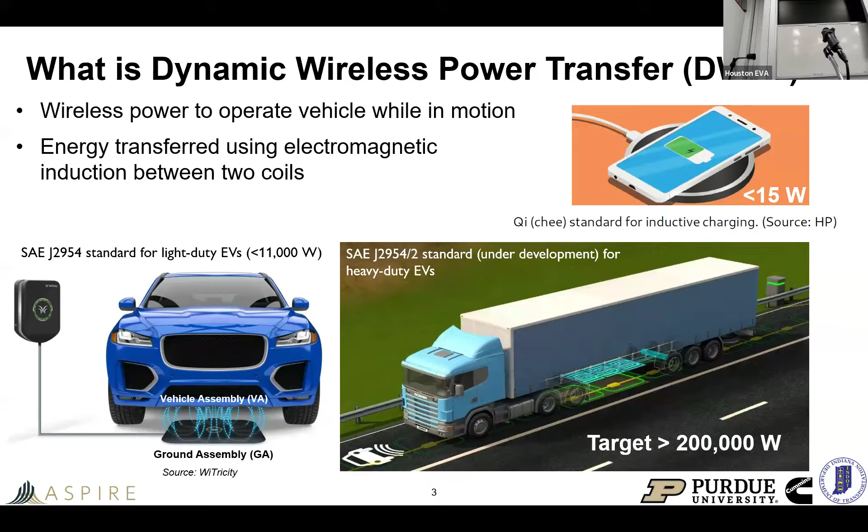And the focus became heavy-duty vehicles for a reason, and we'll talk about that here in a second. But our goal is to make transportation cheaper, safer, more reliable, and we focused in, like I said, on heavy-duty vehicles. The key advantage, if we can get this to work, is a much higher efficiency. I'll just say now that end-to-end efficiency from the utility grid to the vehicle's battery system bus is on the order of 85 to 90%. So very strong. That energy can be supplied to the grid for a number of means.

And the challenge is, of course, for electrification, batteries are expensive and heavy, and that's our target, to lower those. And we envision that the DWPT, at least for heavy-duty freight vehicles, could reduce battery needs by a significant amount, up to 90%.

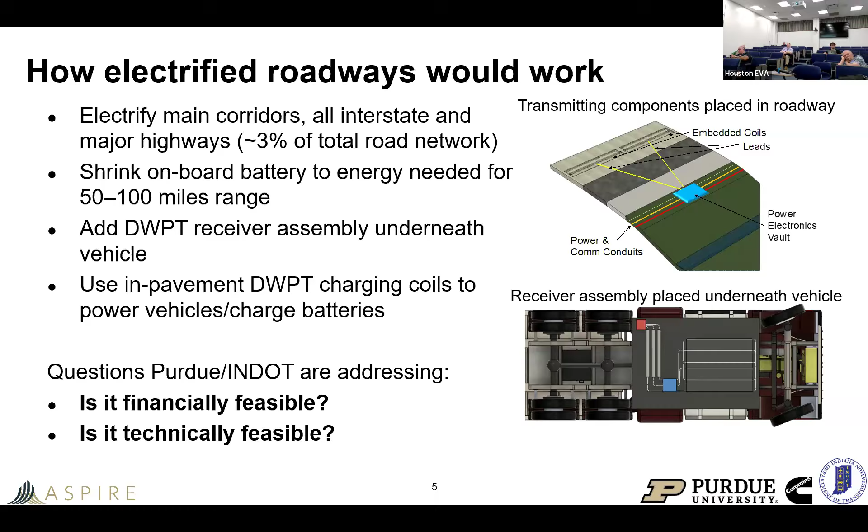Now, if you're thinking about this as a Department of Transportation entity, or you're thinking about this as a vehicle owner, you're wondering, is this financially feasible? Because it's a lot of equipment. And that was one of the targets that we were focused on early in our research around 2019 and 2020. And Dionysios Aliprantis, our colleague, led that.

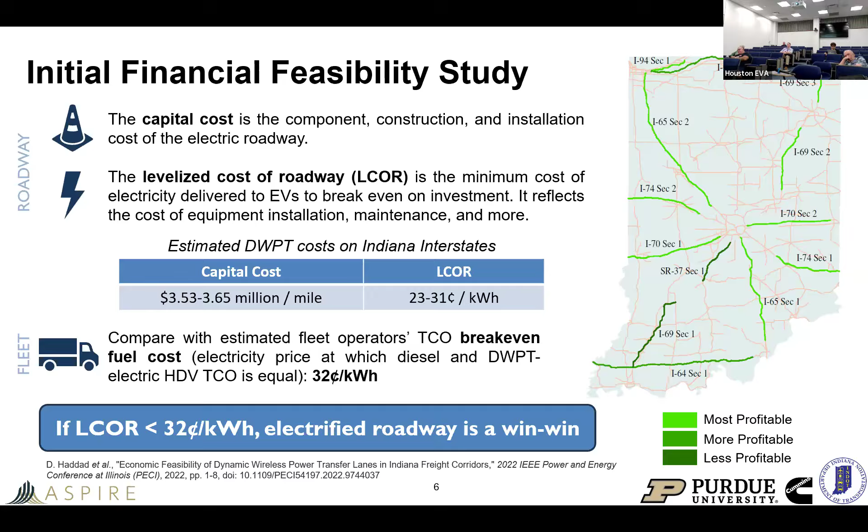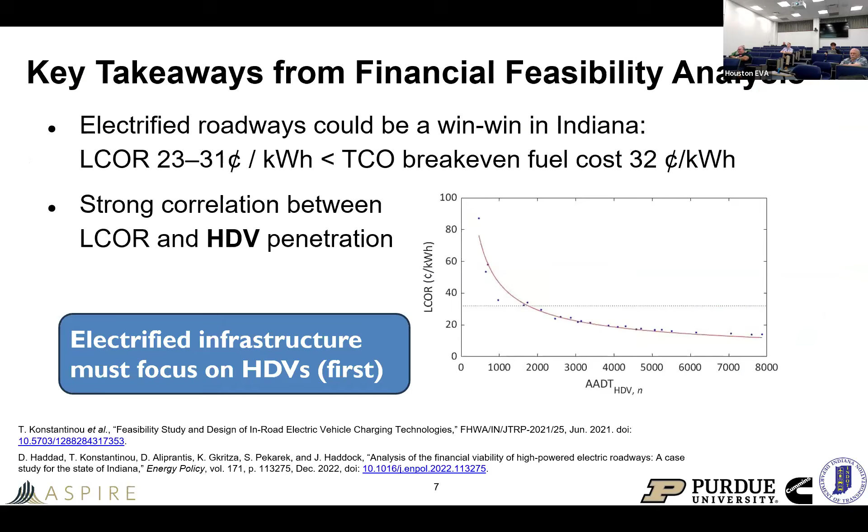And so what you can glean from this is it's a win-win situation, because in Indiana and most ways across the country, the levelized cost of the roadway can be in the low 20 cents. So you can make money, and the fleet operators are happy as well. So for financial feasibility, the key thing is you get the levelized cost of the roadway down by servicing. You don't have to service everybody, but you have to design your roadway system to take heavy-duty truck traffic, and you have to have those heavy-duty trucks on that roadway. And that's what this slide highlights. So that was the feasibility.

Now, the technical challenge associated with this is it requires for each heavy-duty vehicle on the order of 200 kilowatts if it's an 80,000-pound vehicle that's driving 65 miles an hour. And that's a significant challenge associated with this overall system from a technical point of view.

And that's made even more challenging because you have to place your transmitter coils below the roadway surface, more than 2 inches below. And vehicle manufacturers like to have clearances, particularly for heavy-duty vehicles, above 8 inches. So you're talking about over 10 inches of distance between coils, and that's a challenge. So we have high power, long distance between coils.

And what we were able to do, and Aaron Brovont, our colleague, led this, is to design a topology that's a 3-phase topology that enables us to do this and do it for relatively low cost. And why is that? Well, it's because we don't have magnetic material in the roadway. The only thing that we place in the roadway are coils. The vehicle receiver also has coils, and it has some magnetic material to tune the flux paths.

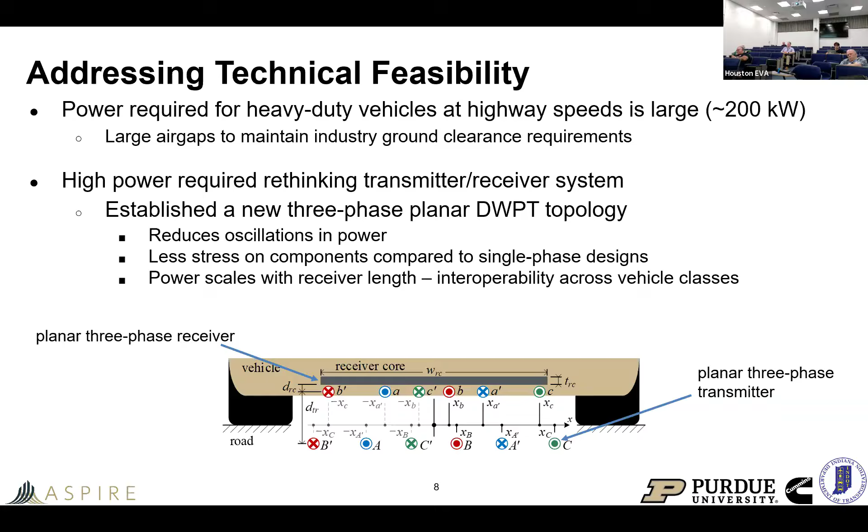I'll show on the next page, this is the actual system that we had tested in our laboratory, and there is the ground assembly that gets placed in the roadway. There's 3 coils there, an A, B, and a C. Each has 2 turns, and then the vehicle assembly as well. You can't see the receiver coils other than some end turns, but then subsequent to that, you see some electronics. And after I present and John talks some, we can talk technically in more detail.

There's waveforms on the right. You know, we're academics. There's nothing that's going to make us more happy than discuss plots.

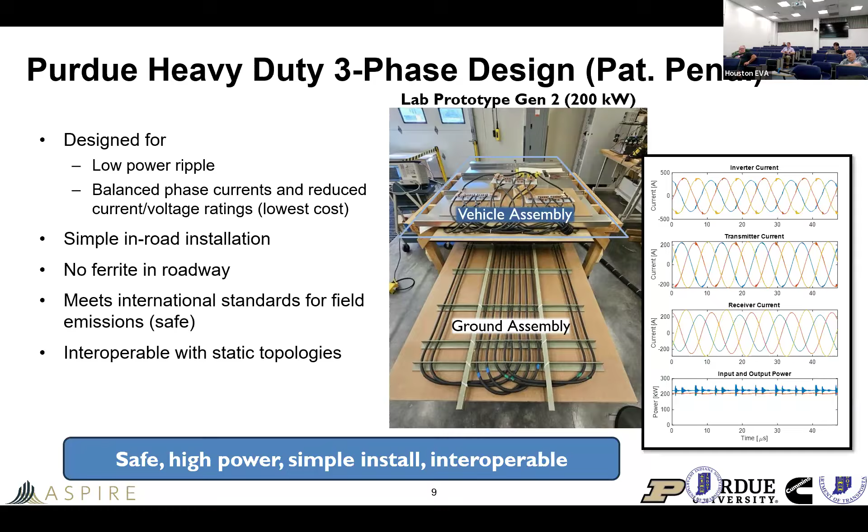But for right now, I'll just move on and say, John then led the questions regarding structural and thermal assessment of our system before the instantiation in the roadway. And John, did you want to say anything about that? No, I'll just point out that we have here at the university, in conjunction with our state DOT, an accelerated pavement facility, which is what you see there. And basically, we're able to build pavements in there.

And you can see on that top picture, there's a pavement. You can see the coil put in it. And then we're going to put some asphalt in around and over that. And then that machine is half a semi-axle. So it's basically 9,000 pounds on a dual tire. So that's half of what an axle on a semi tractor trailer would be.

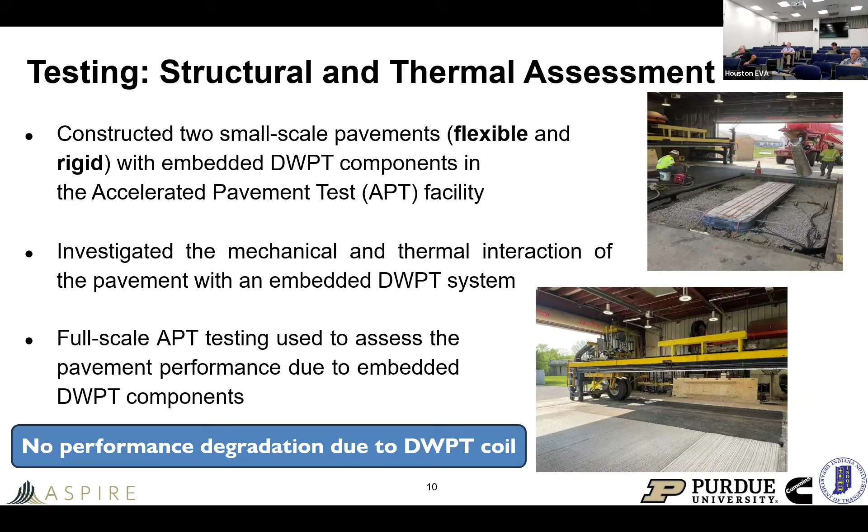And we're able to traffic that back and forth and then get some idea in a controlled environment what the pavement's going to do under loading. And in this case, we had no idea what would happen with these coils under loading, nor did we know what would happen thermally. And so we were doing some thermal testing in a controlled environment as well. So I'll stop with that, Steve, if you have another slide.

Yeah, and John and I will tag team on these because subsequent to those tests, which took a couple years to instantiate and prove out, the Indiana Department of Transportation was interested in going forward and saying, well, how do we actually install this into a roadway system? And that's indeed what we did. The pilot was on US 231, just west of the Purdue campus.

And there were a number of goals associated with it, including validating our performance predictions, demonstrating safety of the technology, and advancing businesses that support such efforts on electrification. It was adjacent to a maintenance facility of INDOT's. You can see that on the top left. That provided kind of a support structure for us in constructing the system.

The roadway then was, you can see the picture here, there was a multi-step process. This was not a new roadway. It was an existing roadway and it's a concrete pavement, and this was intended to then be retrofitted into that. That is not how it will be done in the future. When this comes to fruition, it'll be placed in fresh roadway, but this is the opportunity that we were given, and went with that. And you can see the different stages. We'll have some slides now that show you each of these stages.

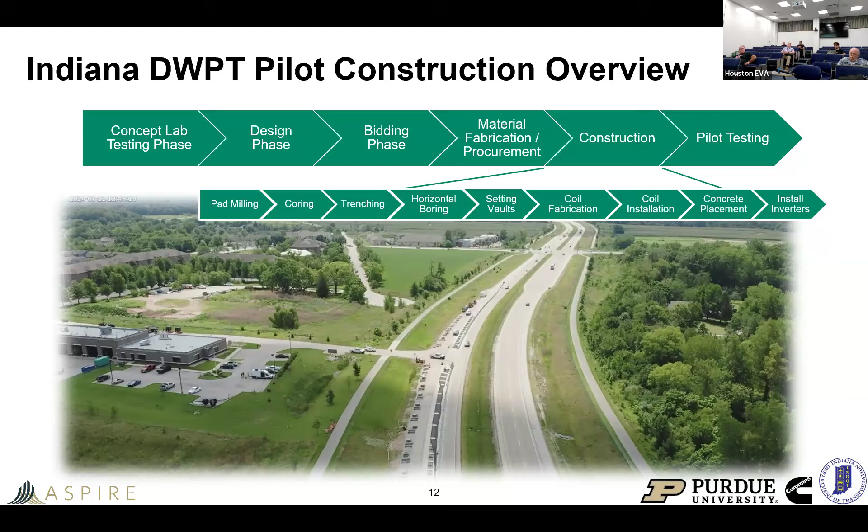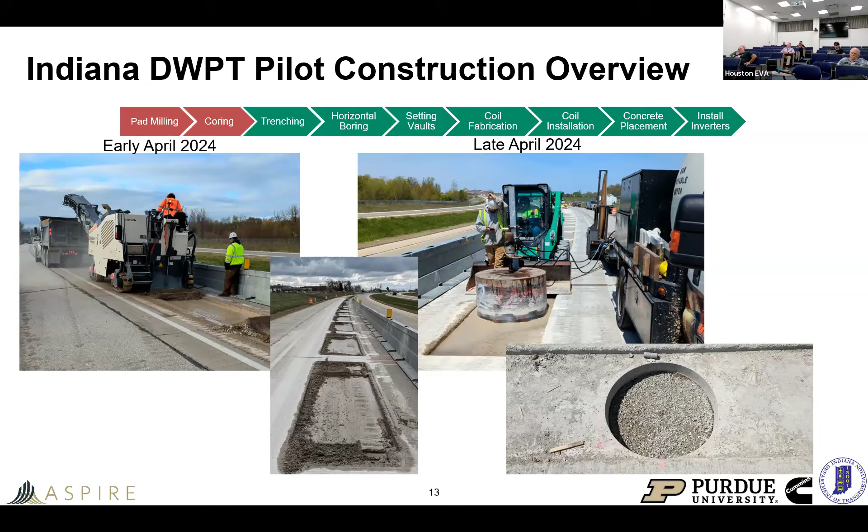And the reason for that 12 foot is there were existing metal dowels that were placed between the roadway sections that are 15 foot long. So we had to stay clear of those.

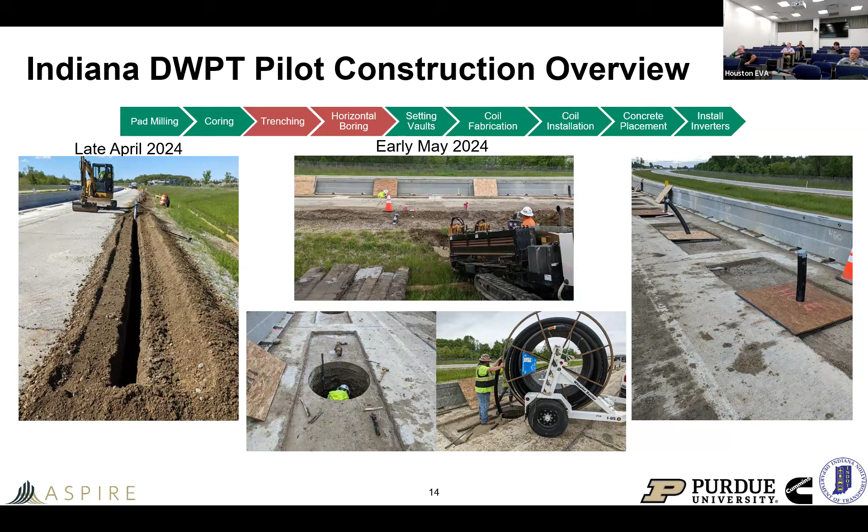And this was the process where we're transitioning more to the electrical side, where we're now adjacent to the shoulder, and they're putting in channels for electrical conductors between vaults that house the electronics. In the center picture here, you can see them. John had mentioned the bored hole in each of our transmitter milled sections. They're now running conduit from there to the side of the roadway to be connected to the electrical system.

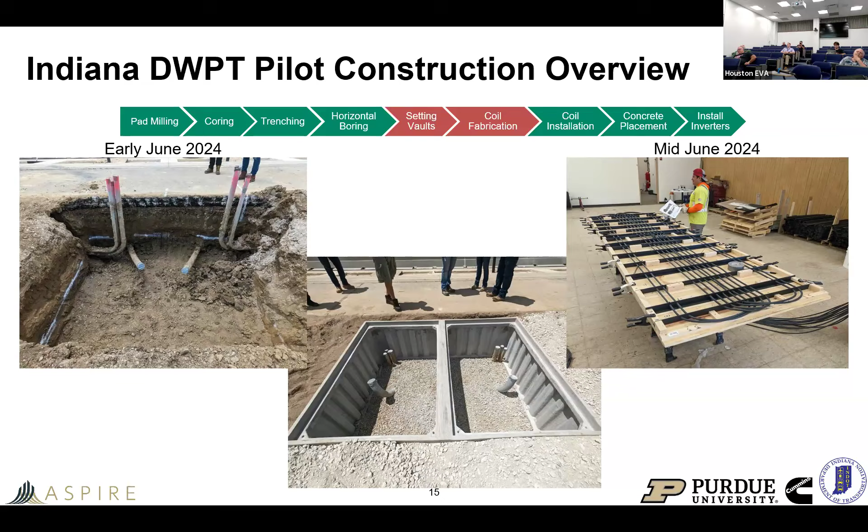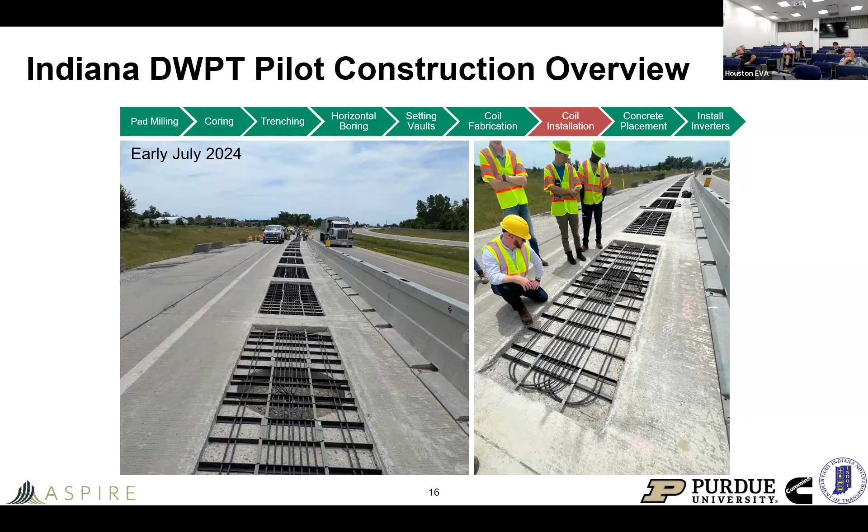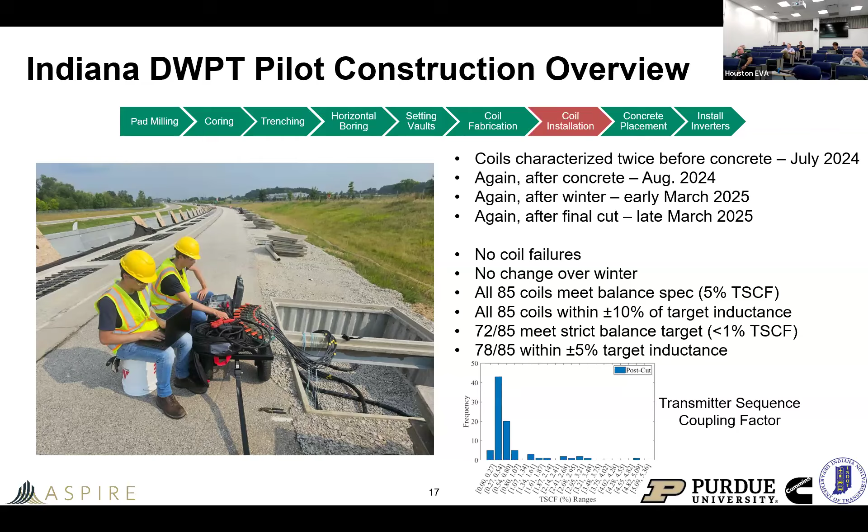And the bottom line is, even though this was the first ever instantiation here, all of them met that target. And the majority were far superior on meeting that target. We've tested these coils now 4 times through different stages of construction and after weather and traffic, and they've met this and performed exactly the same. So there's been no degradation that we found.

And on the right is them putting the inverters into the vault. The inverters were manufactured by a company in Indiana, PC Krause and Associates. They produced those 85 inverters. They're air cooled. So you can see the fins that are facing us on that right-hand picture where the contractor is putting it into that vault.

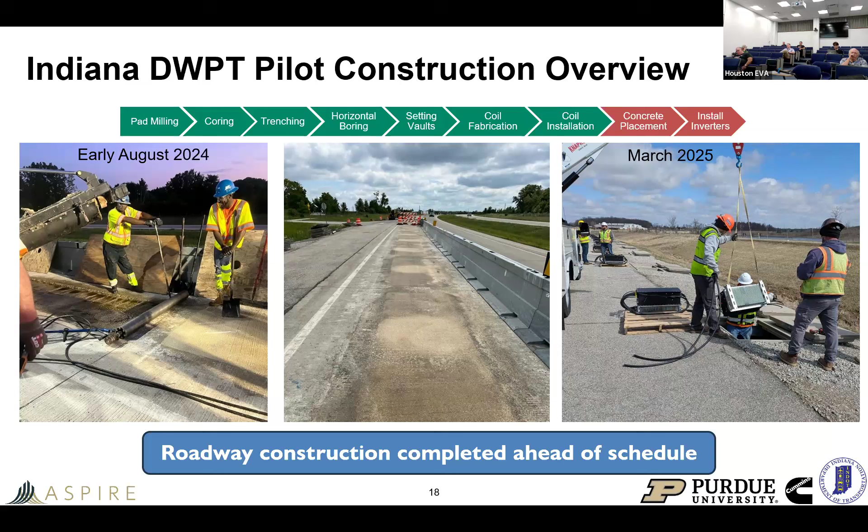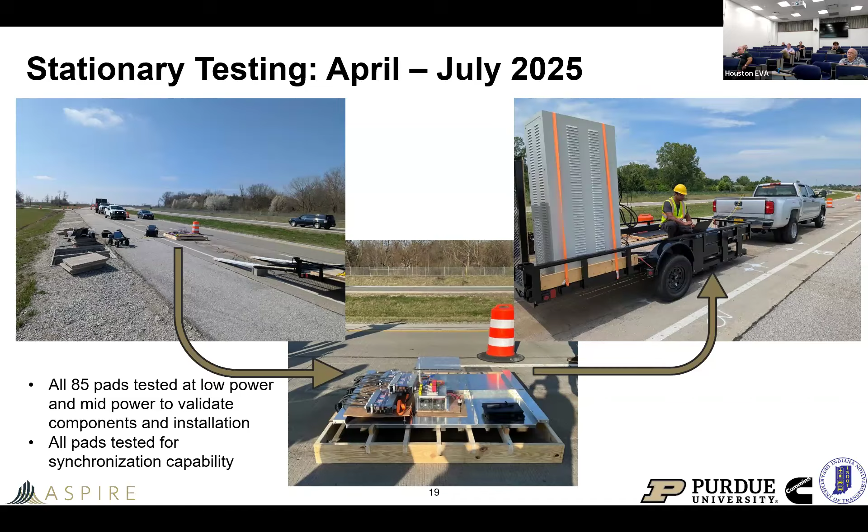And after that successful testing, we tested with the Cummins vehicle. Our responsibility in this effort was to design the receiver and implement it underneath their vehicle. And then we also had a DC to DC converter to interface, take the energy from the receiver and communicate to the battery/propulsion drive. The way this worked is their control module, the Cummins control module, would send a power command to us. And the DC to DC converter that you see as a gray box there, its whole function in life was to deliver that power that was commanded.

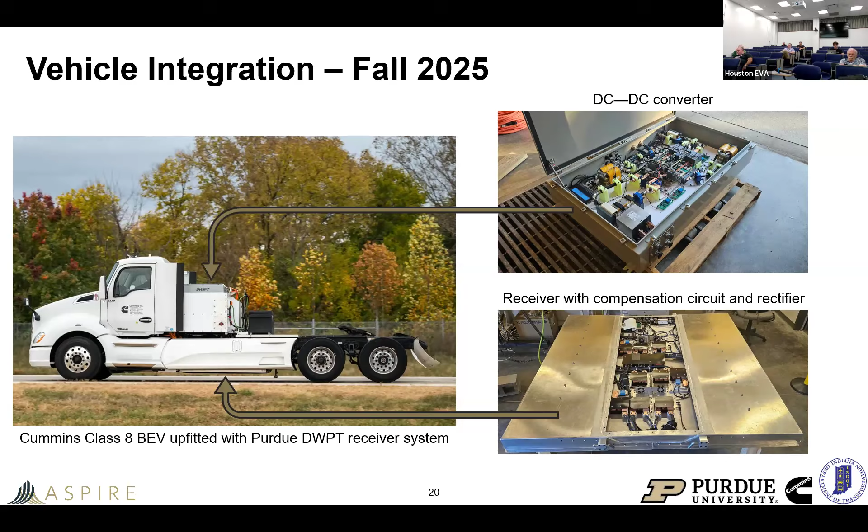Rob Swanson, our research engineer, was instrumental in building the bottom right here receiver unit. A remarkable achievement for an electrical engineer to get this structurally sound for 65-mile-an-hour tests. And Vatan and Isaac and Nick were the ones that constructed that DC to DC converter. They designed it. And this just shows you some plots associated with it.

We can go back to these and talk about voltages and current if that's your love, but I'll just point you to the first thing to say. The green lines are the most important on the plot. Those are the power that the roadway's delivering to the vehicle. So this is the power at the DC bus of the vehicle in green. And then the level that's shown is what the vehicle commanded.

So the bottom left shows 50 kilowatts commanded. You can see that the roadway delivered that. There is an oscillation. We'll talk about that here in a little bit, but on average, it delivered exactly what it was supposed to as the vehicle is moving 65 miles an hour. Then the command came for 150 kilowatts, and you can see that that was achieved as well. The achievement comes when you're over the pad.

So if you remember, our transmitter pads are 12 foot long, but that leaves 3 foot of a gap between them. And so you can see this oscillation that occurs. So there's 150 kilowatts, and then it drops. And then it goes back up. And that drop is because we have the 3 foot gap between our transmitters. Do you have to have that? No, you don't in future roadways. We did because of the dowel rods that were in the existing roadway.

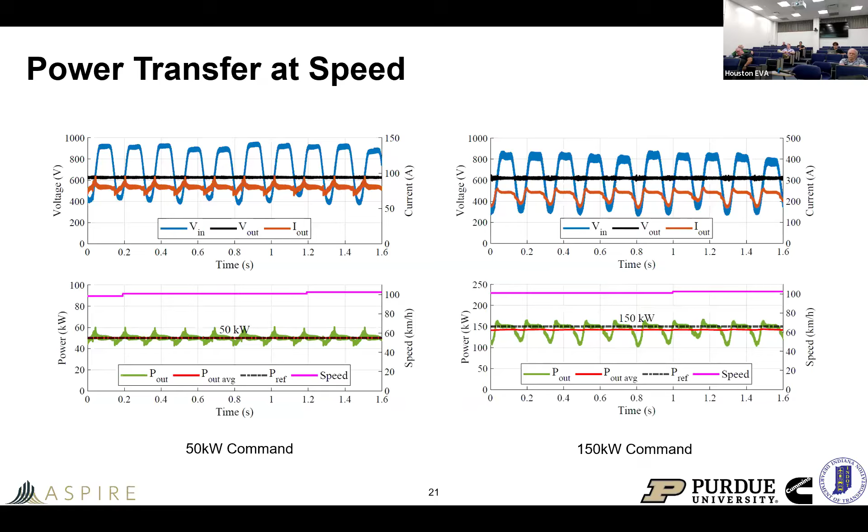Our target for power transfer was up to 200 kilowatts. We had a battery system that was supplying our roadway, and it couldn't deliver the full power, so we didn't get to 200 kilowatts, but we did get to 190 kilowatts at 65 miles an hour. And this was the plot that shows that. The note here is our peak is 190 kilowatts. Our average was about 168.

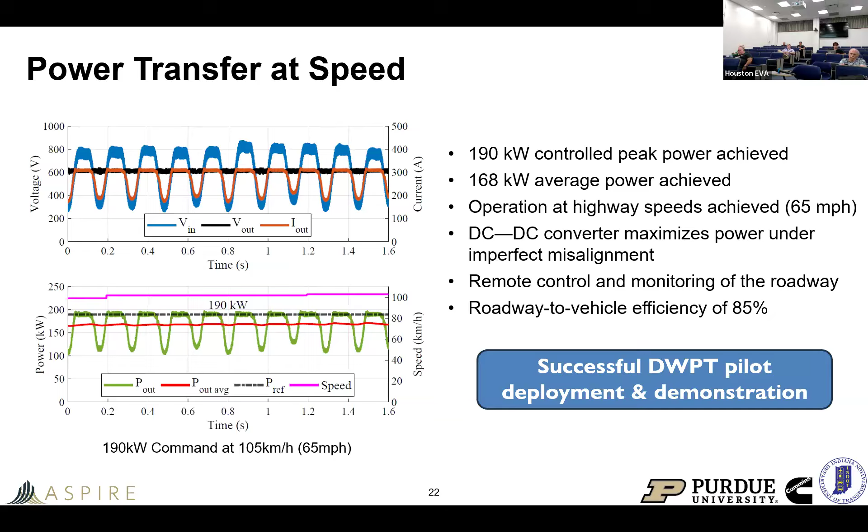And just looking forward, our Aspire Center has been asking, when could we see these? And our target was to develop pilots by 2026. This was created many years ago, like in 2021, and we've achieved that. And Aspire is also supporting the development of roadways like this in Florida, some in Michigan. There is one at the inland port, not a full roadway like this, but something quasi-dynamic in Utah

at Salt Lake City. And we're anticipating, maybe not in the US, it may be globally, but in the next 5 to 8 years, we'll probably see longer roadway sections, 5 to 10 miles. And the hope is that by 2040, we can see this rolled out on interstates. And Aspire has a target where we would like to see 1,000 miles of roadway with multi-state pilots by that time. John, did you have anything else you wanted to say?

No, I don't. I think you covered it well. Thank you. Yeah, thank you.

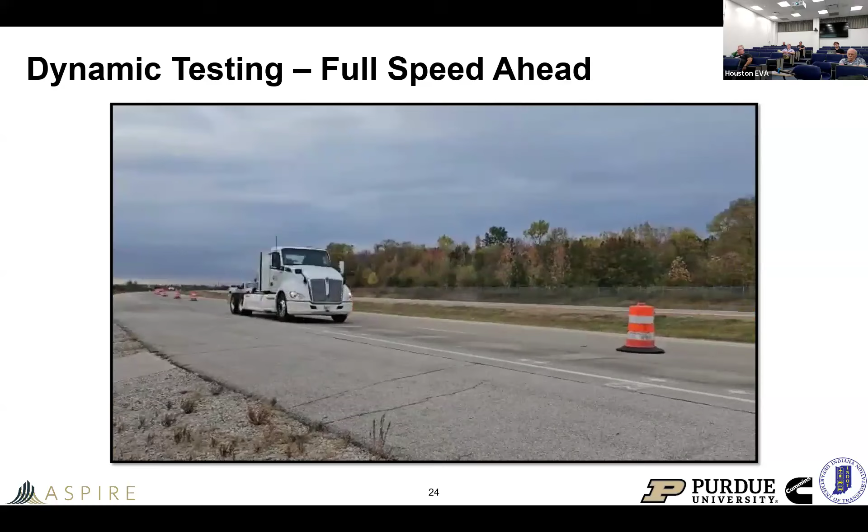We have one video. This is the truck. And there's more available online if anybody would like to see it. But with that, I know we've taken quite a bit of your evening, and so we're happy to answer any questions that you had.

Well, thanks, guys. That was really impressive, and I really like seeing the truck moving down the roadway at the end. You went through all the work that it took to get to that point. I'm glad that we got to see the truck moving across all those coils that you buried into the vaults and so forth. That's really good. I really appreciate you presenting to us. You're welcome. We enjoy it.

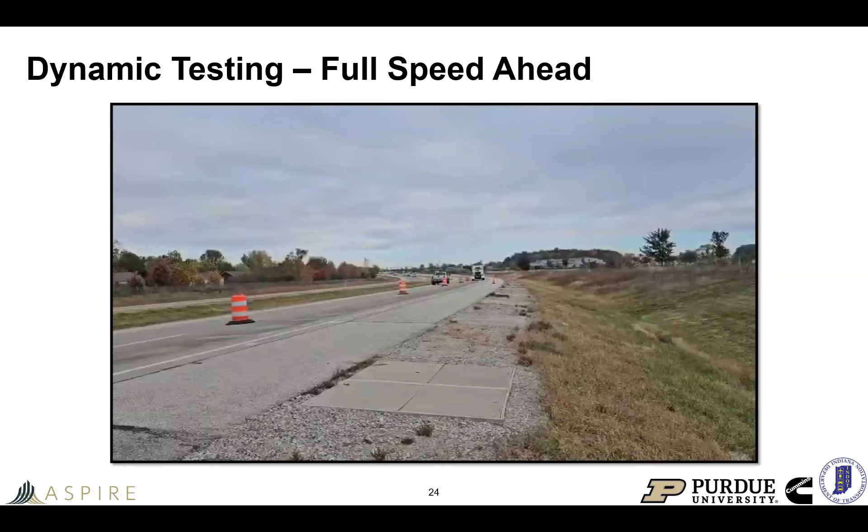We're going to have Sebastian fill us in on what's happened over the last month. We've seen growth, I might say, in the vehicle between 2 months ago and a month ago. So this will be exciting to hear what's happening here at Rice.

Okay. Hello, everyone. We're the Rice Electric Vehicle team. We're the solar car team stationed in the garage right next to the room we're currently meeting in. We're preparing for the American Solar Challenge in July 2026. So at this stage, we're finalizing our design. Most of it's pretty much finished design-wise. We're just building it and correcting some of the things that didn't pass the initial rounds of inspection. Just a couple small things like our latch design for the array and redesigning some of our wheel axles.

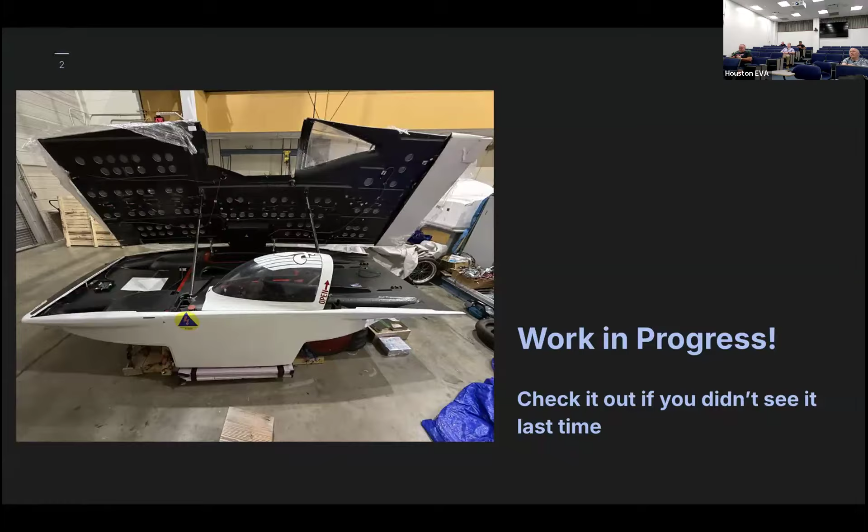So a brief recap, the American Solar Challenge is actually made up of two events. The first is a track race that serves as qualifying for the second event, which is a cross-country race. So the track race is an endurance race, meaning they give you a set amount of time and they turn all the cars loose on the track, and the team that drives the most mileage wins that event. But it's still a really interesting event.

So usually they just pick two cities and have this cannonball style. It is technically an endurance race, but most of the best teams are able to make the entire mileage. So then it turns into who can get there the fastest, who's able to hold traffic speeds for the longest, not have to pull off and charge, who's able to make all of the hilly terrains and things like that. So it's a really good test of not just EV technology, but also what college students can do as we prepare to become professional engineers later.

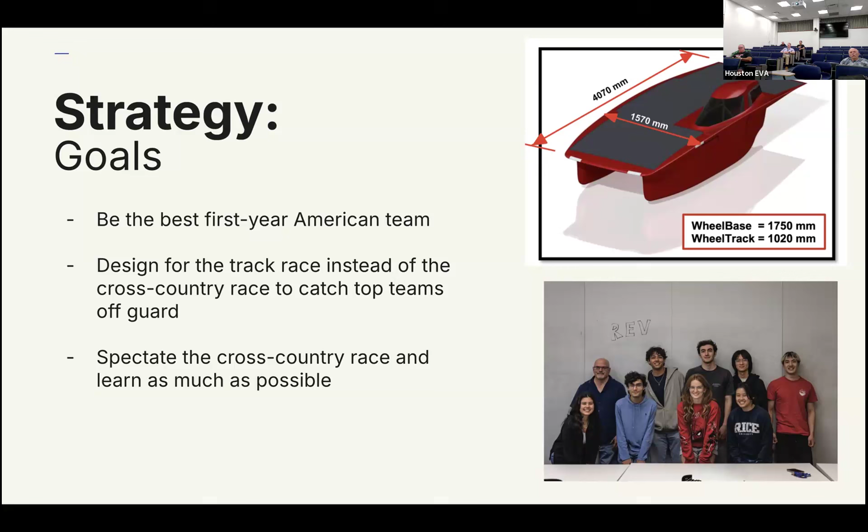So because of our car's design, our main strengths are the carbon fiber chassis. We have a super efficient hub motor. We have a lightweight battery. And then, of course, the vehicle stability we have from our suspension layout. And we'll get to all of those in a bit more detail and recap those in a second. We are smaller than newer cars with larger solar arrays. So strategy-wise, this actually means we want there to be less solar energy. So we're actually hoping there's a cloudy day. The reason for that being our battery pack will be the same size as everyone else's, but our car will be lighter.

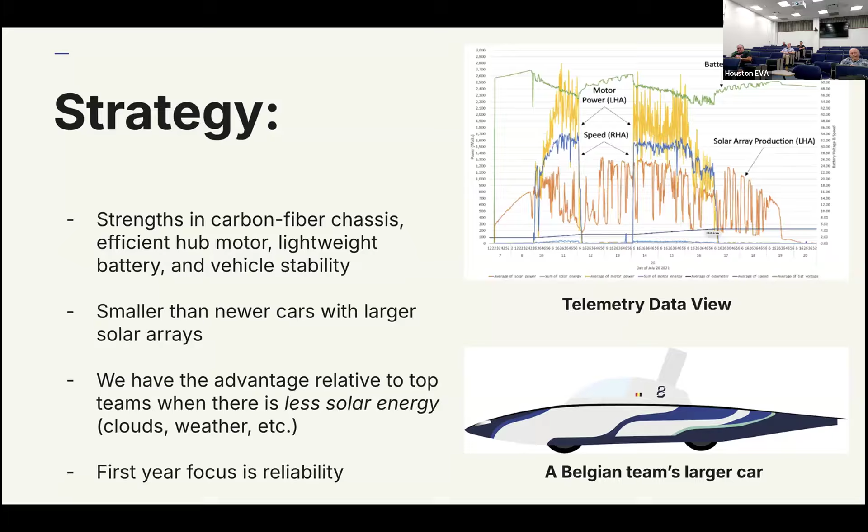And then all of that is mainly just for planning. The biggest thing that solar brings to a competition like this is you have to be adaptable because you never know what the conditions will be. And there's not just a set strategy to hold. You have to adapt to the solar conditions in addition to all of the racing conditions, if there's incidents on the track, things like that as well. So our main goal is just to successfully complete the race. For a lot of first year teams, just making it through the 3-day inspection process is a big part of the competition. So we'll be extremely happy if we make it through that and are able to complete a couple laps.

So mechanical, as far as update-wise, since we had our spring break two weeks ago, we've gotten a couple of revisions back on our competition reports. So we sent along a couple 53-page and a couple shorter reports that they go through and analyze, lots of different simulations and things like that.

So we have to update a couple smaller things, but as far as the main big design objectives go, we've pretty much passed those. We're working on cooling systems right now, kind of waiting for our battery pack to be finished before we start installing those. We're currently putting the brakes in and tuning those. We're fitting new wheel and axle designs.

The main goal is that we have the engineering design showcase at the Ion, hosted through Rice's Oshman Engineering Design Kitchen. And we need a sort of temporary solution to put the car on wheels to get it there. And then we're also integrating some of the fiberglass and carbon fiber composite structures for the battery pack that we talked about in our last meeting.

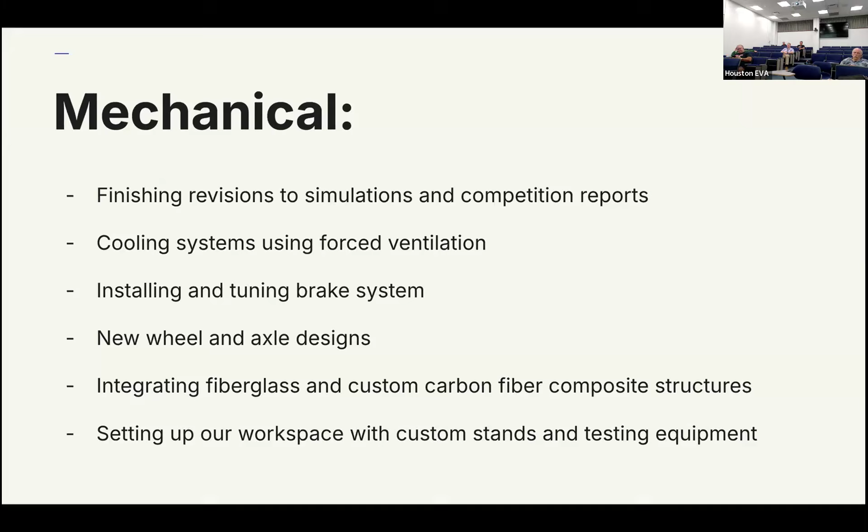And then setting up a couple workspace things, like a stand for our top shell so we can separate that out, roll it outside, start doing some solar testing, and start working on getting the battery pack actually installed in the car itself. So here's a couple photos of what's going on there.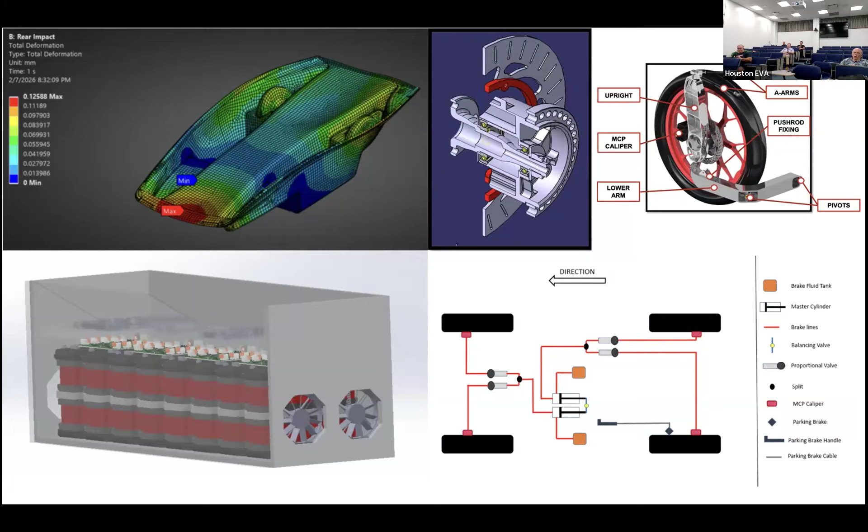They have what's called proportional valves. So we can change, when you press the brake pedal, how much of that force goes to the front wheels or the rear wheels. And then we also have a second proportional valve, in addition to the one you would find in a normal car, that allows us to tune left and right. That helps us in case we need to move our ballast around from the left side to the right side or things like that.

And so a little bit of context to understand why our chassis is such a big advantage. Most teams are typically starting with a tubular steel chassis. If you look at old race cars from the 60s or 70s, that's pretty much what you would see. You're able to do all of the calculations you need by hand there.

And on this picture specifically, this is another first-year team we've been talking to a lot at UT Arlington. They'll be a really fun competitor because they're essentially the opposite strategy to us. They're a much larger car with the 6 square meter array, but a steel chassis, and we're a smaller car with the carbon fiber chassis. So it'll be an interesting neck-and-neck race for different reasons.

And then our car's advantage is a monocoque design. So instead of being made up of a bunch of tubes, you're able to have the body of the car itself provide rigidity and structure. You can see those walls there actually are structural, and they're just thicker in places where you expect more load. So that was kind of the motivation for the chassis and mechanical design of our car.

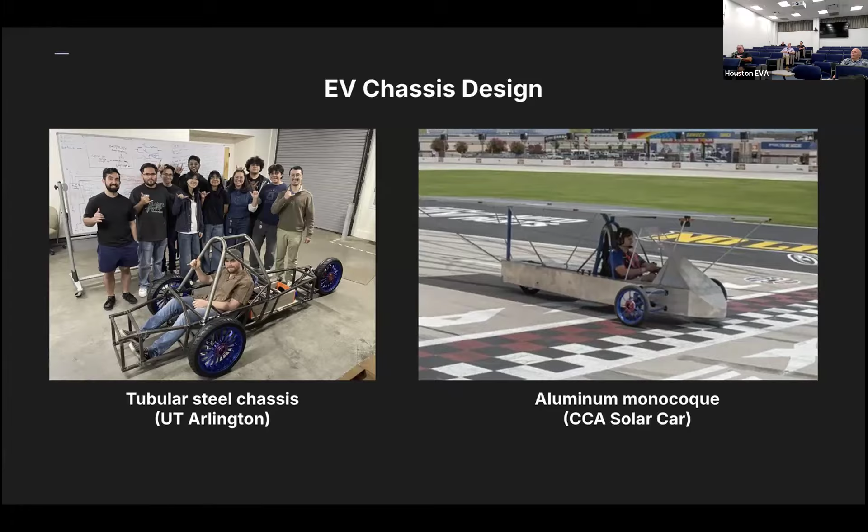That was actually my high school car, or an early version of it. And so that was kind of my motivation for wanting to move to carbon fiber monocoques. And then there's also the layouts. One of the most interesting things about this competition is that all of the cars look really different from each other, and it encourages a lot of creativity.

Our approach is to take the best of both of those worlds. So we have a catamaran design, but it's symmetrical. So we put the battery pack in the left, driver on the right, and then we have a monocoque design, but using carbon fiber. So the majority of our first kind of year was figuring out how to source all of the material for that.

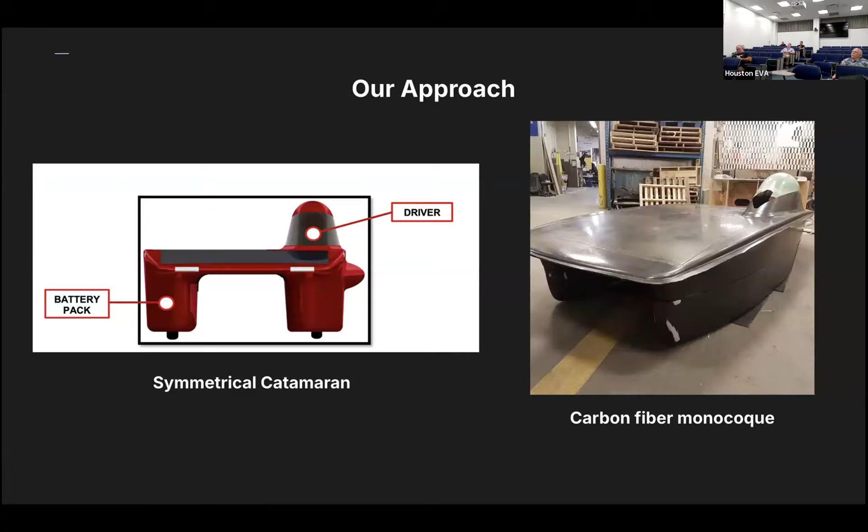And then we also are experimenting with sandwich panel composite structures. So essentially combining multiple materials into your sandwich panels that allow them to absorb more energy. The energy absorbed would be the area under the curve in this graph. So you can see the blue is what just a normal one material would be, and then the green there is our sort of optimal ratio that we're going for. And that allows us to have much more lightweight designs because in impact scenarios or things like that, they absorb more energy. And so it really speaks to the importance of keeping the weight down in an electric vehicle.

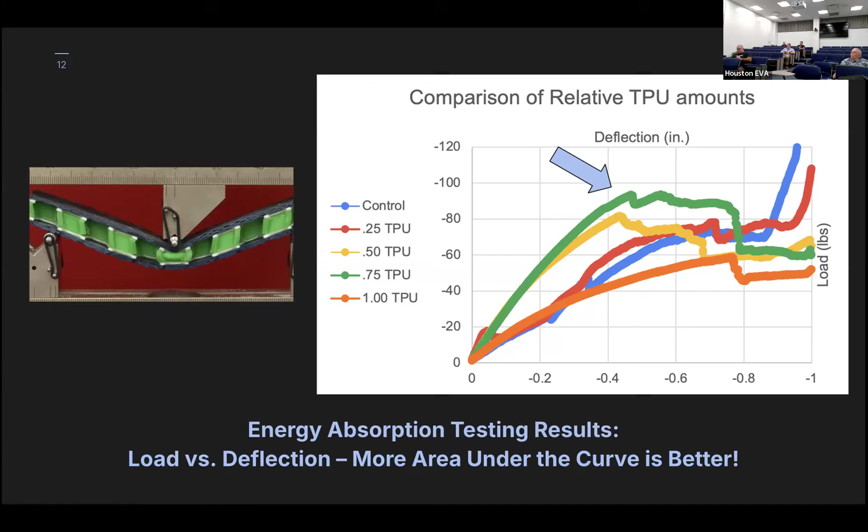And we're essentially producing EVs that can perform as well as the more lightweight internal combustion counterparts you would find in the efficiency competitions in Shell Eco Marathon or something like that, while being able to be fully solar powered and not tethered to any charging network at all.

On the electrical side, we split it into a couple different projects. We make 3 of our own electrical boards. We have one that's a main kind of dashboard control system. So it integrates all the different telemetry signals. It's what the driver interacts with on their dashboard. It's actually housed right in front of the steering wheel. And it connects directly to all of their controls that will be on our main dashboard.

Then we have a simple low voltage one. That one controls lights. When you press the hazards, it makes sure that both of those flash on and off, and it doesn't override the turn signals or things like that. And then various fault lights for if the car is shut down, different scenarios there, if there's a battery fault. And then it's redundant from the display. There's a couple physical red and amber signals on the dashboard that will be sort of redundant error messages for the driver there.

And then a board that will supplement our batteries, our charge controllers, and our motor controllers. And so we're also integrating commercial products for those. A company called Prohelion makes battery management systems specifically for solar cars and college competition vehicles. That BMS will manage 4 cell management modules that we talked about our design process for selecting in the last meeting. We'll be using a motor controller from them as well. It's extremely efficient, so it'll pair well with our motor that we have.

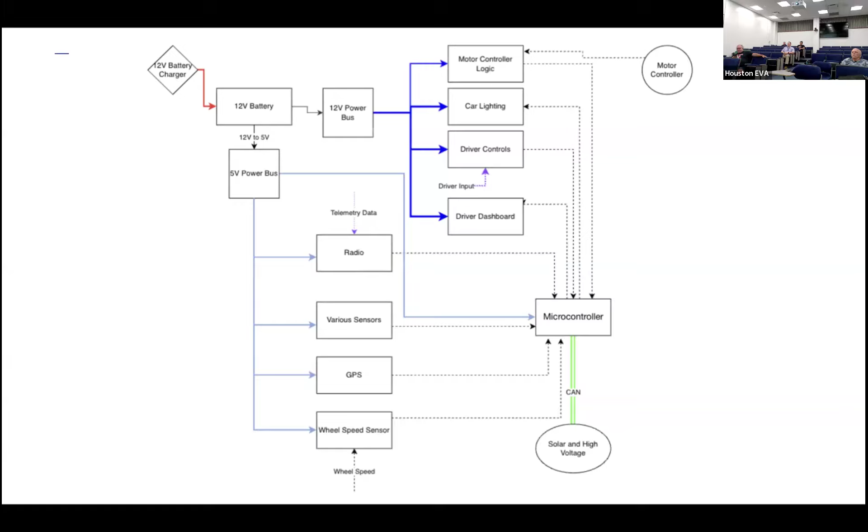And then the 12-volt battery itself will also be what turns on that pre-charge circuit that starts the battery, what powers our motor controller, as well as powering the different driver controls, so like our cruise control system and things like that, and then the actual driver displays on the dashboard themselves. And all of that will be managed right now by a Raspberry Pi Zero, but we've also been trying out a couple different options there, mainly just wanting something that can survive super high temperatures that it might encounter in the race.

As far as high voltage, there's a lot of redundant contactors there. So a lot of this is controlled by the regulations, but there's a big labeled arrow to the side of the car with a big disconnect switch. So if you ever see us on fire, you just run up to that and press it. There's one identical to that for the driver. And then additionally, there's one that disconnects the solar array. But then the other two main disconnects are right after the positive terminal on the battery. So those completely shut down the entire car.

And then our 12-volt battery turns on our battery management for the high voltage battery, which is split into 4 different modules that we're currently selecting the cells for right now. And that's kind of what makes up our battery management unit. So I guess if that was a little complicated with all the wiring going around, the main idea is that power comes from the solar arrays, it charges the battery, and then from the battery, it goes to the motor. And then the 12-volt battery is mainly just powering all of the systems that oversee that happening.

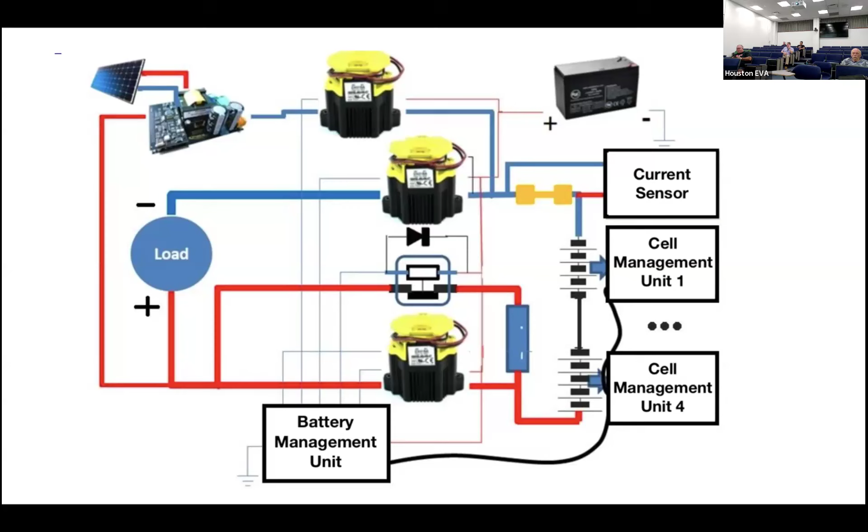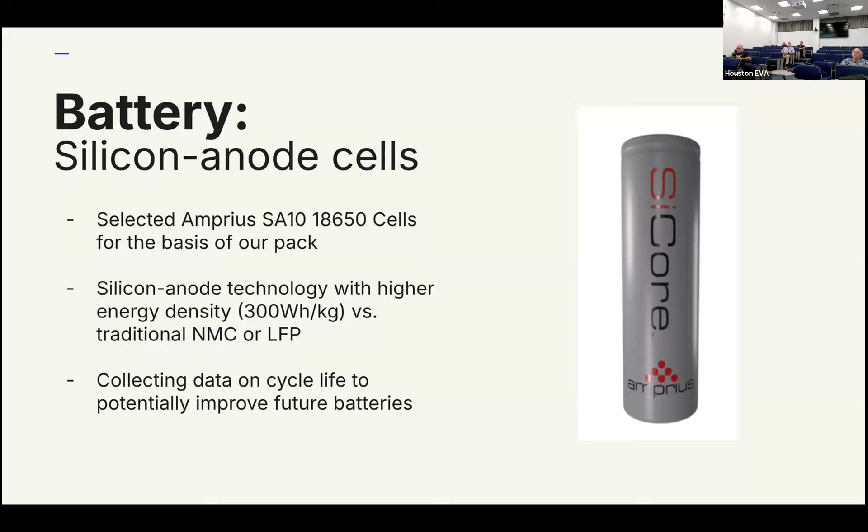And so our battery is another main advantage we have because we're using 18650 cells from a company called Amprius. They have extremely high energy density. They're 300 watt hours per kilogram, which I think we were saying earlier, most cells are around the 140, 150 mark. So if you were able to extrapolate this kind of energy density to full-size EVs, you'd see a huge improvement there. The problem with silicon anode technology is their cycle life isn't great. So with our sort of college scenario where we're building a new battery pack every 1 to 2 years, it's the perfect opportunity to collect data on that and potentially give some research back to these companies to help them improve their products.

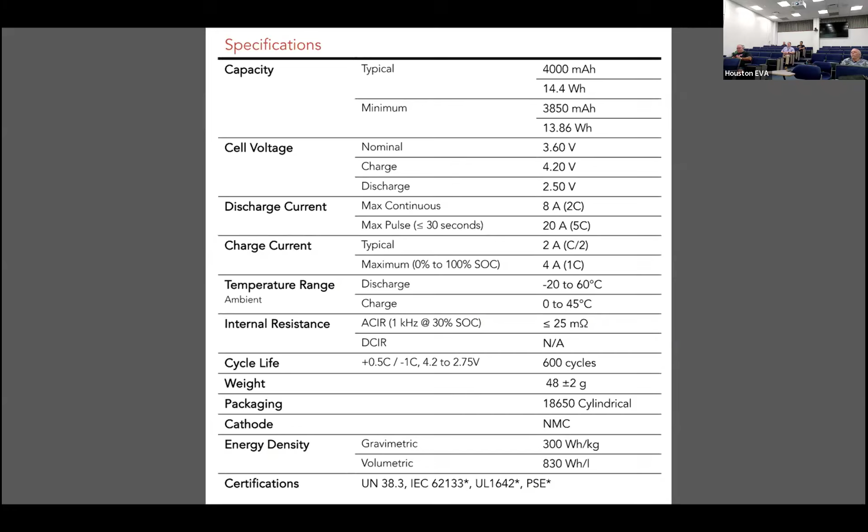So there's a variety of specifications. It's 4,000 milliamp hours and very lightweight. But then we take all of what we talked about in the last meeting, we took all the specs from there that got us to our layout. So this is what we had designed at the beginning of the semester. The essential summary of this is that the rules limit us to a capacity of 5.25 kilowatt hours. And then the interesting thing about that regulation is that kilowatt hours depend, of course, on your voltage in addition to the number of cells you have.

So we played around with a couple different layouts of the pack itself, and we settled on one that uses 360 cells, connecting 36 in series and 10 in parallel. And so when I mentioned those modules from earlier, those split that 36 in series by 4 to have groups of 9 in series and 10 in parallel. And that gets us pretty close to that maximum capacity. It only weighs 17.28 kilograms, has a nominal voltage that's also pretty low of 129.6 volts. So in the grand scheme of EVs, pretty small battery and pretty lightweight, pretty efficient. It could support a very high peak power output as well. Those cells are very good in things like drones in addition to EVs. But 12 kilowatts is all we'll be needing for our car since it's so lightweight.

And then the battery itself is integrated into a box that's removable from the car. So we could take it out and charge it while we're testing it. And most importantly, we can seal it in the competition, so that way they know we're just getting power purely from the sun.

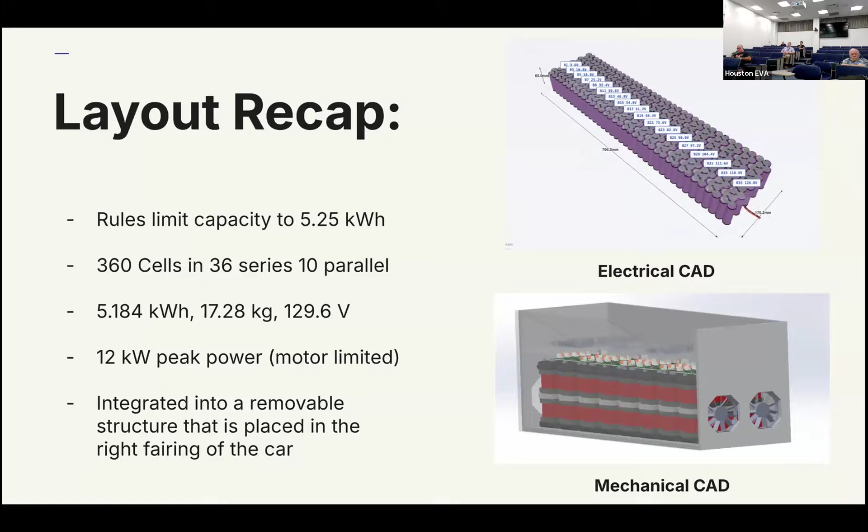Our motor controller is just a commercial product, but it's specially designed and customized for solar racing, so it's super efficient. It works with a variety of cruise control algorithms that we're trying to test. And we're currently working on interfacing with CAN, the communication system commonly used in cars, as opposed to SPI or something like that. That way we can interact with our microcontroller and the PCBs we have.

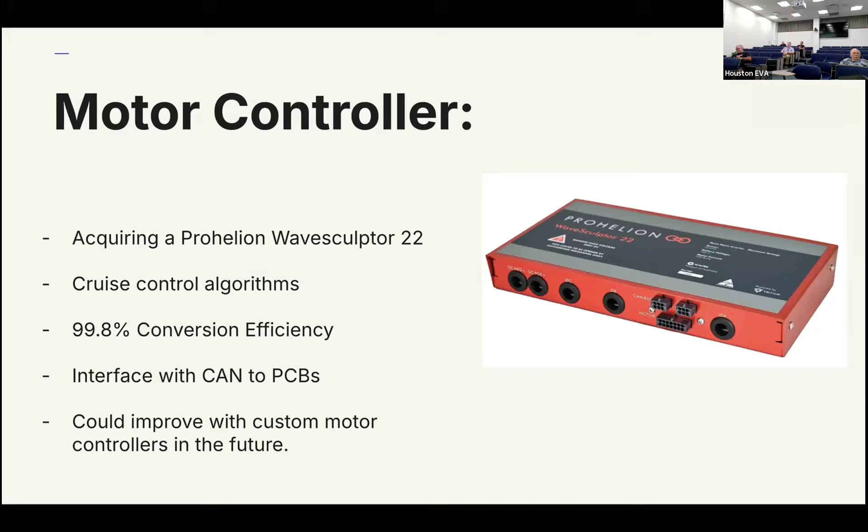And we're exploring options to potentially make a custom motor controller in the future. This might be 2 years down the line, but it's another one of the more cost-effective projects that some of the more advanced teams take on later. And so this is kind of the main idea for that. There was a senior design team at Georgia Tech that took on that project and open sourced it. So they essentially benchmarked the exact same motor controller we're using, and were able to design something that achieved the same performance, but much smaller and significantly cheaper.

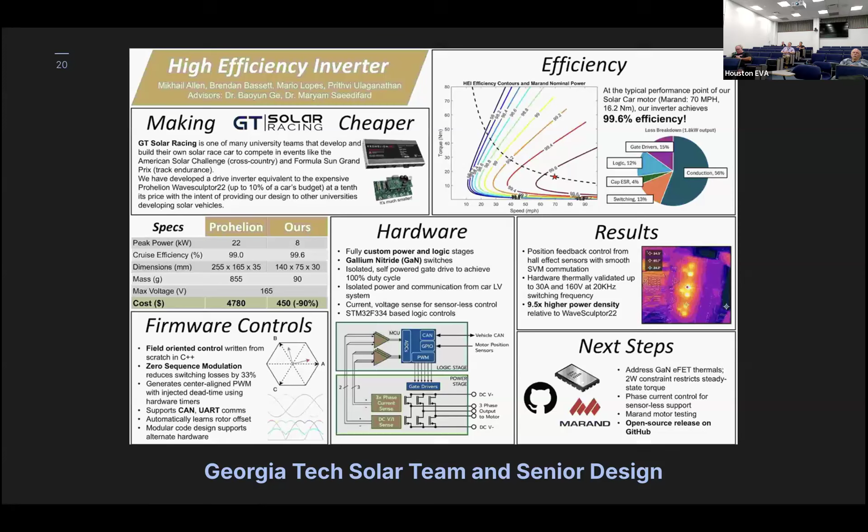So the advantage from that would be designing things ourselves and being able to use newer technologies like gallium nitride transistors that would help make it, not necessarily more efficient, but a lot easier to manage thermally and a much smaller component.

And then our last big electrical advantage is our hub motor. So instead of having a motor with a whole bunch of drivetrain systems, the entire thing is just packaged into our left rear wheel. It has a lightweight aluminum enclosure and a single drive ratio, but that's still good for a top speed of around 80 miles per hour. Combined with that motor controller, you're still seeing efficiencies near 98%. Might be closer to 96, but still extremely high, especially in comparison with combustion vehicles. And it can sustain 5 kilowatts and go up to 12 kilowatts.

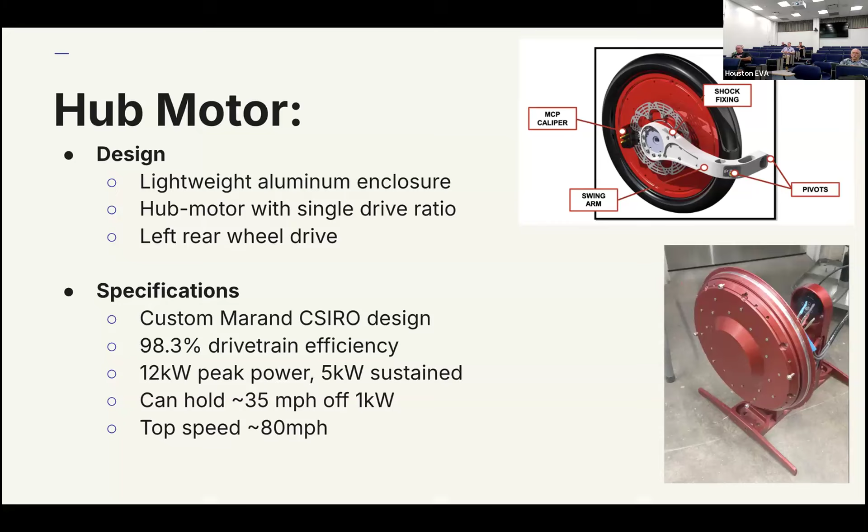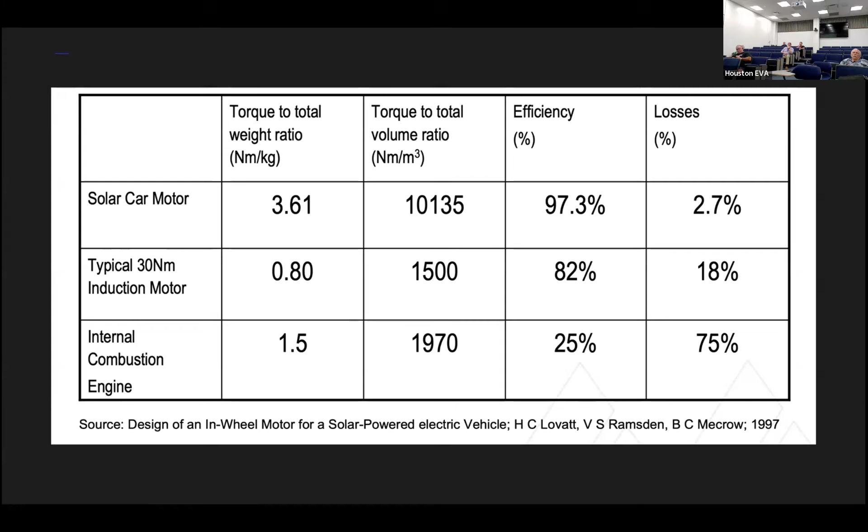One of the main advantages of EVs in general is just the sheer amount of efficiency you get in your drivetrain, going from an internal combustion engine at 25%, or even 40% in the most advanced cars possible in Formula One. You jump straight to 80% in traditional EVs. And then using a hub motor, especially one designed to be as efficient as solar car motors, you improve that even further.

Because from the battery management system's perspective, all of the cells that are in parallel with each other, it kind of sees them as one unit. And so it saves you a lot of safety issues and potential thermal issues to have them be as close to identical as possible, so that way they're all being discharged together at the same rate.

And as that testing procedure goes on, we essentially just have a couple cycle testers. Some of our team members take some cells home and leave that running while they do homework. Can't leave them alone, of course. And then once we get those, we just fill in our 3D printed holders until we have a full 360 and are ready to spot weld everything together.

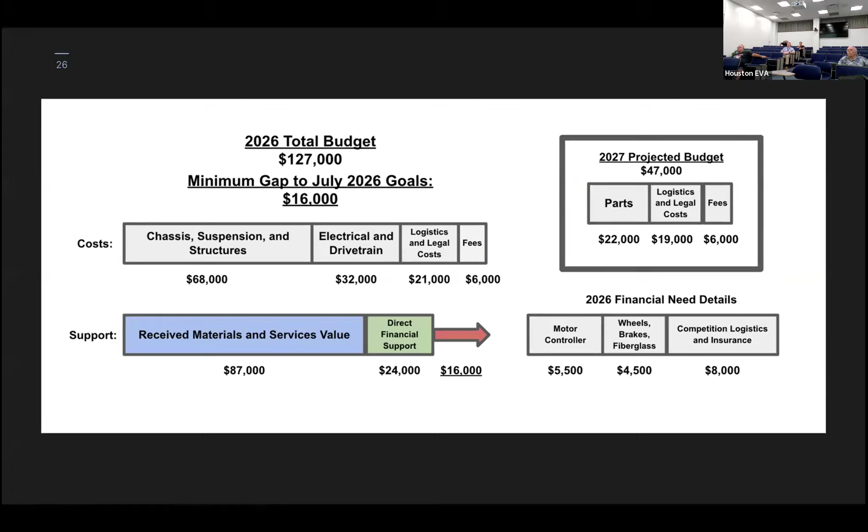We also hope to get more involved in the community, and once it's finished, take it to science fairs, local educational events, and then of course raising all of the money and managing the accounting to operate all of those expenses. So we've raised a significant amount, and we're pretty comfortable now that we will at least be able to finish the car and have a decent platform for testing and upgrades. And then we're just looking for a little bit more to cover logistics and actually getting to the competition.

And then for next year, we're expanding; we're a full club now that's open to all of Rice, so not just engineers. We're designing a new car for 2028, using what we've learned from this year testing and designing our battery pack. We have a good idea of what we would look for to improve those, mainly using 21700 cells. That same company that makes the silicon anode cells is also looking into even higher energy density 21700 cells that could potentially bring our energy density up to 350 watt hours per kilogram.

As well as our solar array, there's a lot more efficient options we could go with there. And with regulation changes, we can even make it bigger. And a couple mechanical things as well. So we're looking into making carbon fiber wheels. That would be a big deal for Rice because we'd be one of the few places able to actually make molds and carbon fiber parts here in-house versus needing to use an external workspace for that.

Figuring out a tire sponsorship, that's another big business side thing there. And then reinforcing some of the suspension parts, especially in the rear where it has a motorcycle style trailing arm suspension. So reinforcing that to stand up to Houston roads a little bit better.

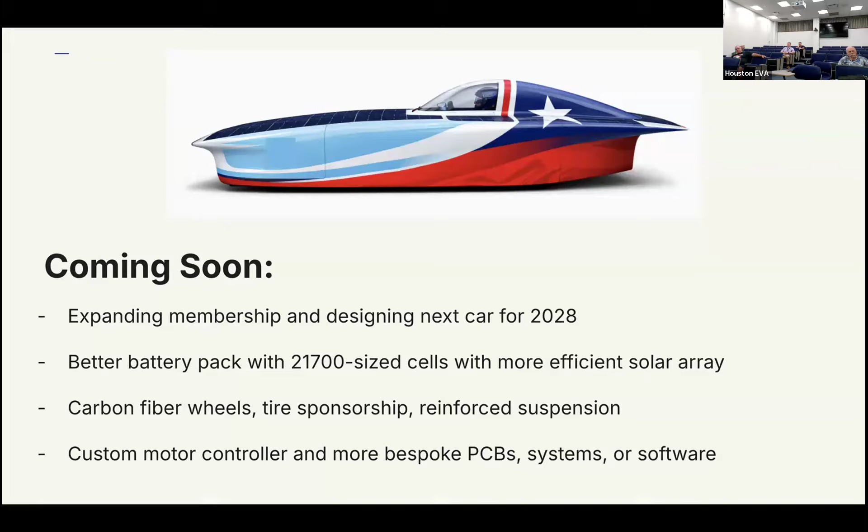And then, as we mentioned, some of those electrical parts that we buy from different engineering companies, we hope, as we become more proficient and understand how these things work, to reverse engineer and work with the software suites for them, being able to recreate those. So the motor controller would be the best cost advantage to do ourselves, but there's also teams that make their own solar charge controllers and battery management systems. It just depends what your electrical team is looking to do at the time and how much experience everyone has. But there's a lot of opportunities to make it even better. So we're excited to start working on next year too.

And yeah, so that's our April updates.